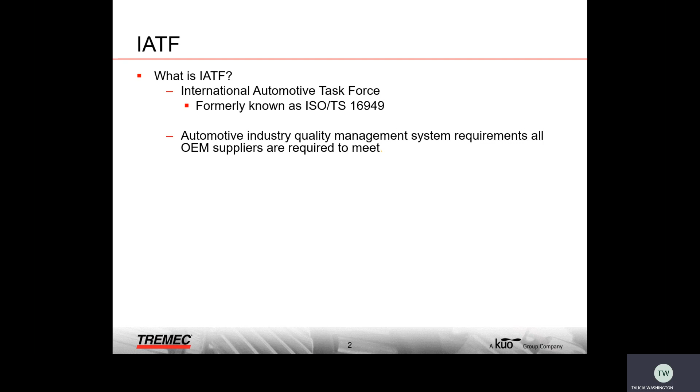What is the importance in obtaining our IATF certification? Besides the fact that it provides our customers with the confidence that we can produce quality products, without it we will not be paid. Without it, we cannot ship, which means we cannot be paid. If we do ship, the customer will not pay us for those transmissions we've shipped to them. So it's free for them.

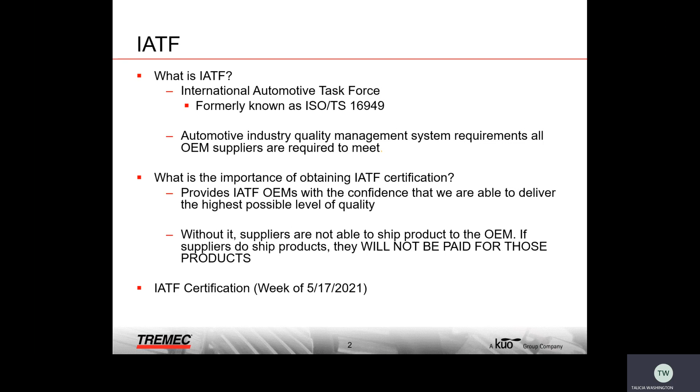So this facility is actually going for certification in May of next year. Now you may be asking, how in the world are we shipping and getting paid if we are not IATF certified? One of the guidelines in order to obtain certification is you have to have 12 months worth of performance data. Since we are a newer facility, we do not have that yet, which gives us a grace period so we can still provide transmissions to our customer, business as usual. We'll still be paid for it and all of that good stuff.

Now, what is a quality management system? Long story short, quality management system is what we do and how we do it. It's our formal system of all of our documents, procedures, forms - having that in one centralized location, our quality policy, the different metrics we measure every month. All of that together creates a quality management system.

Everyone in this facility plays a role in establishing and maintaining an effective quality management system, whether it be documenting our processes, following the processes, or using the current controlled documents. That's a big one, okay?

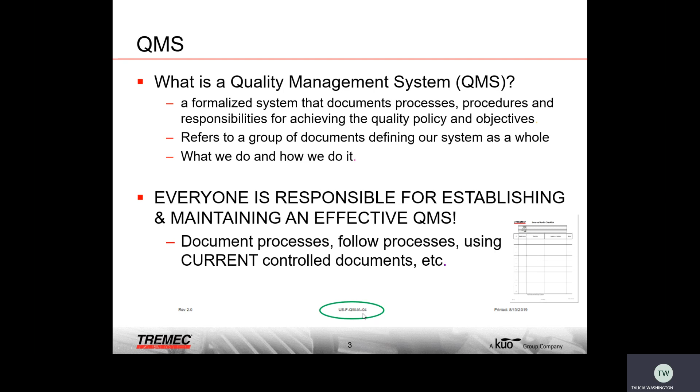So you'll know a document is controlled if in the middle of the form you see US-F, and then there'll be some other letters and numbers depending on the process it belongs to. If that information is not there, it is not a controlled document and we shouldn't be using it. If it says FM- and some other letters and numbers behind it, it's an old document and should not be used.

Here's the quality policy. This policy, it is required that all employees know it and be able to state it in their own words, which shows that you understand it. That is an IATF requirement.

So within a couple weeks, you will receive a quality policy badge. It's literally the size of your ID badge and goes on the same hook. Keep it on your person. Make sure you are looking at it and understanding what it is. Once again, you don't have to know it word for word, but you need to be able to explain it in your own words versus just reading it off if an auditor asks you what it is.

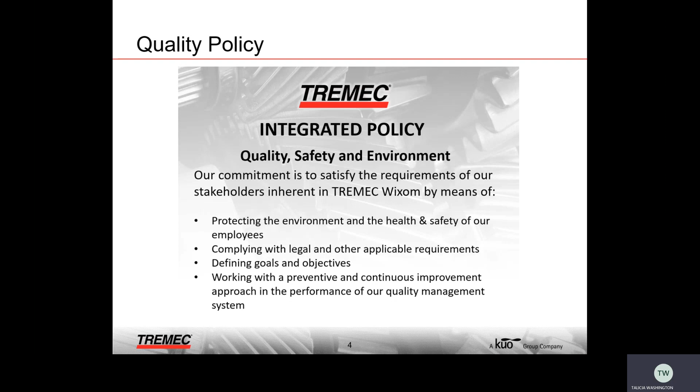Here at TREMEC, we do have a zero defect mentality. We don't want to accept defects from our suppliers, we don't want to make defects, and we definitely don't want to send them to our customers.

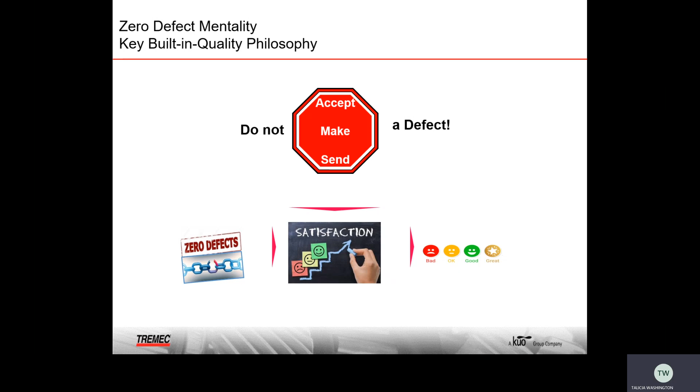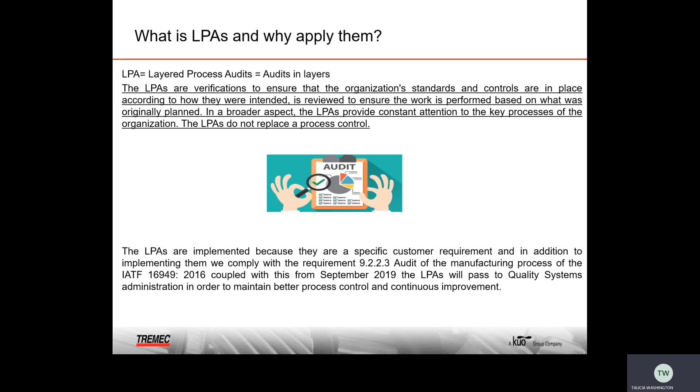So one of the measures we have in place to help with this are layered process audits. Layered process audits are essentially audits done by the office staff as well as supervisors, team leads, and quality technicians. It's an audit trying to make sure that the controls we say we have in place are actually still in place and are effective.

I tell people all the time, LPAs are not to get the operators or the material handlers or anybody in trouble. It is meant to make your life and your job easy, effective, and efficient.

So when you're being audited, don't be nervous. They're going to be asking you specific questions. Some of the questions might just be them trying to get an understanding for their own knowledge. Other questions are going to be directly from the checklist, which stems from typical things that we're doing, making sure we're doing our first offs and things like that, as well as things specific to the control plan and the work instruction.

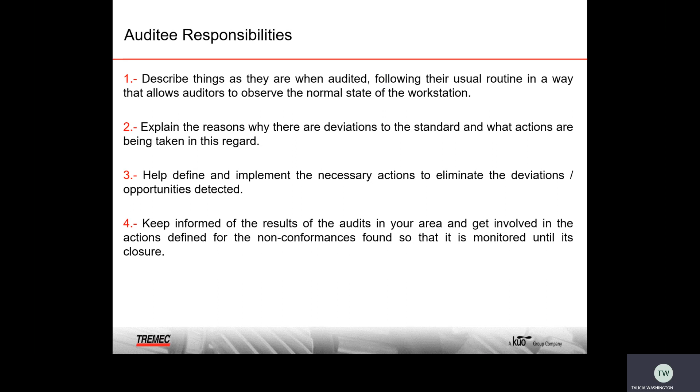So if they ask you a question and you're not doing it, don't feel like you're going to get in trouble or anything like that. Just explain to them why you aren't doing it. It could be a training thing, it could be we need to update the documentation, it could be we just need to update the checklist. Either way it goes, we want to make sure that we get it addressed and fixed.

Now, cleanliness. This is the important part. By now, you should know that we are making the transmission for the Corvette. This is a vehicle that costs about $75,000. I also want you to keep in mind that every single 2020 Corvette is already sold. Even if we're still building that transmission today, it's already sold.

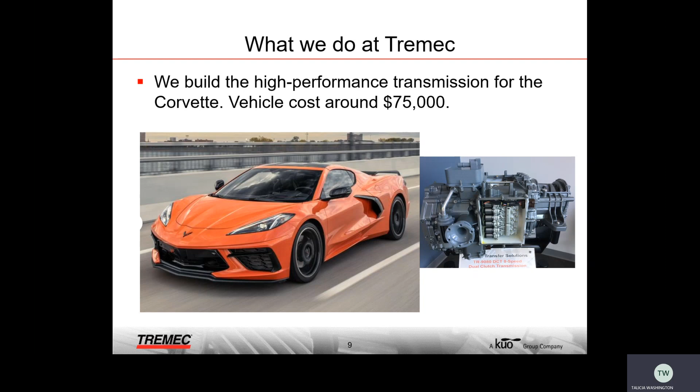Somebody already has it. So I say that to say, if you spend $75,000 on this vehicle that is in extremely high demand, you'll be very upset if you got a transmission that failed for whatever reason within like 8,000 miles. So we show you this picture to see the valve system, which we're going to get into right now. That valve system has small and tight tolerances. The valves control the shifting and the parking of the transmission, which is huge. Too much sediment in those valves will clog those valves.

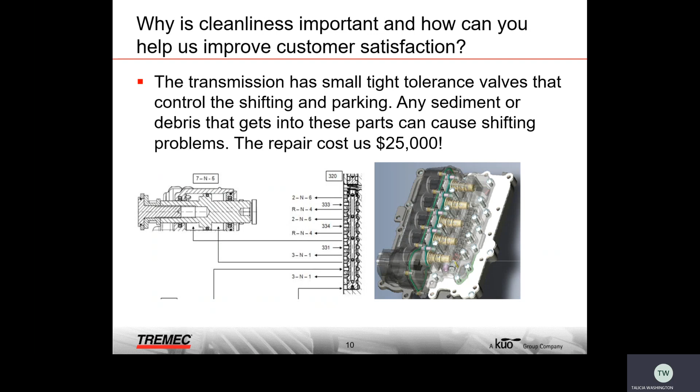If we cannot flush those valves out, we have to completely replace it, which is $25,000 a piece. So that's very huge, and this is why we go through so many measures to completely eliminate debris. Not minimize, eliminate. So 40 microns, we're allowed 40 microns.

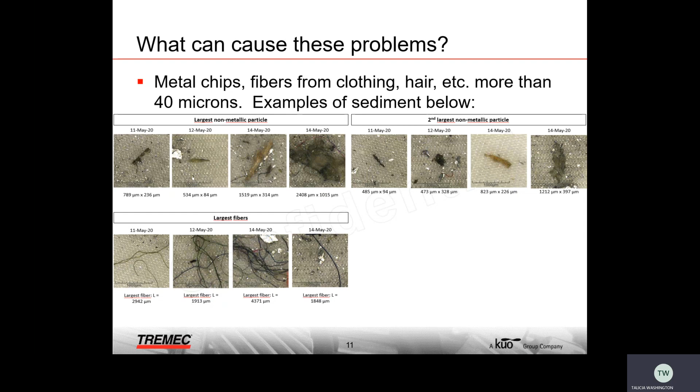These are some samples that we've taken from oil, from transmissions that were on site. Thankfully, they were not sold or shipped yet. You can see the things that were found in the oil. We had to pull those transmissions, make sure we flushed them out, and did what we had to do to get those particles out of the oil.

Now, I know 40 microns is not something you talk about every day. What is a micron? How big is that? To put it in perspective, imagine taking a flower like a daisy that has a lot of pollen, and you shake it in the sunlight and see those little flurries flying off. One pollen is about the size of 40 microns.

Now, putting it in perspective, look at a piece of hair. The diameter of a piece of hair is almost twice the size of 40 microns. So that's telling you exactly how small it is and how sensitive this valve system is.

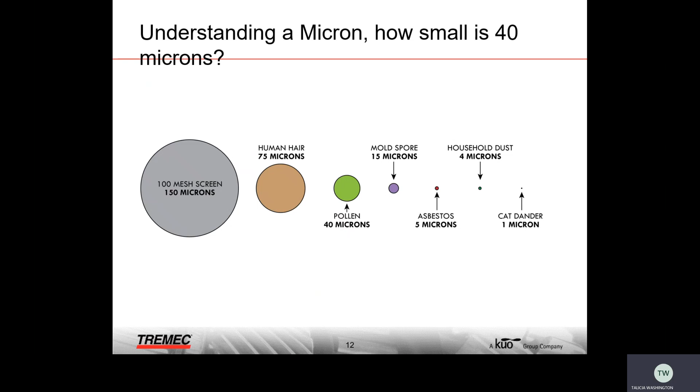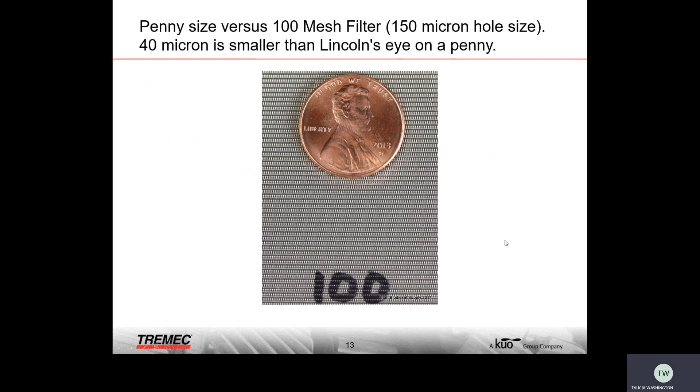Here's another way to put it in perspective. The holes on this mesh filter are 150 microns. Lincoln's eye right here is actually larger than 40 microns. So our allowable tolerance is smaller than Lincoln's eye. That shows exactly how sensitive this transmission is and how important it is.

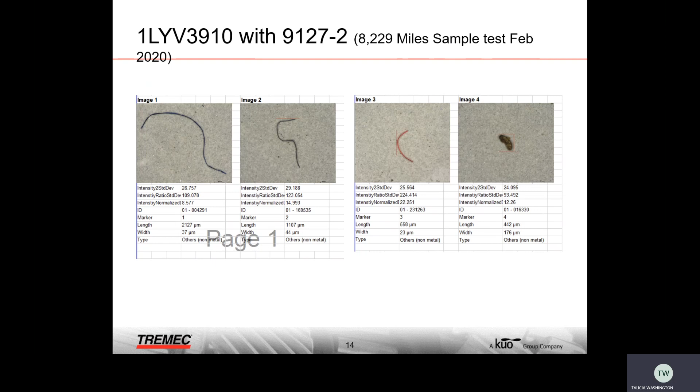Here's an example of a transmission that actually did fail. It failed 8,000 miles in. Once we took it apart and did our analysis, these were the things found. It looks like it could be something off of some clothes, some lint or a string. Don't really know what this is. It looks like it could possibly be a bug or something. Nobody really knows what it is. Either way it goes, the transmission failed, costing us $25,000.

Here's another one that failed 9,000 miles in. Once again, it looks like different threads and things like that it could have been.

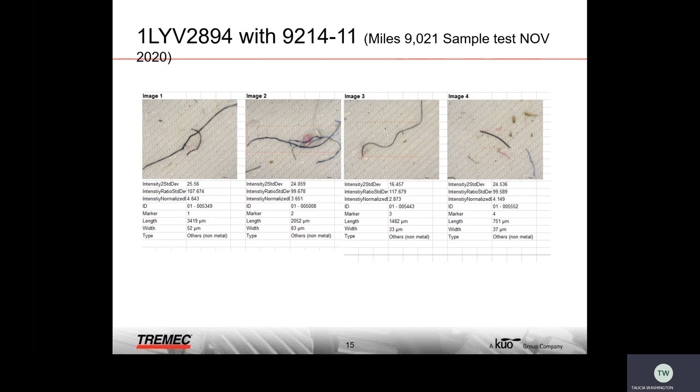As we go on, sometimes you realize exactly how much stuff just kind of falls off, like how many times you just look down and there's a hair right there, or threads from your clothes somehow just end up there. That's why we have all of these measures put in place to eliminate the debris that is falling off in the clean room. That's why we wear those lint-free lab coats, to make sure our clothes are covered and prevent anything from falling off and going into a transmission.

Our gloves, making sure that the required safety shoes do not go outside. They do not leave Tremec. They don't go outside, period. They don't leave the building, I should say. And also the hair nets, the beard covers, all of that.

One thing we're also working on is getting vacuums for the stations. We have a couple, but we want to get more so they're easier to access, making sure people use them so we can really, really get rid of any debris that may be sitting around. The air quality is great, actually great air quality in there. They turn over the air 4 times a day, so we're constantly getting fresh air. Just doing everything we can to make sure we are eliminating debris from the clean room.

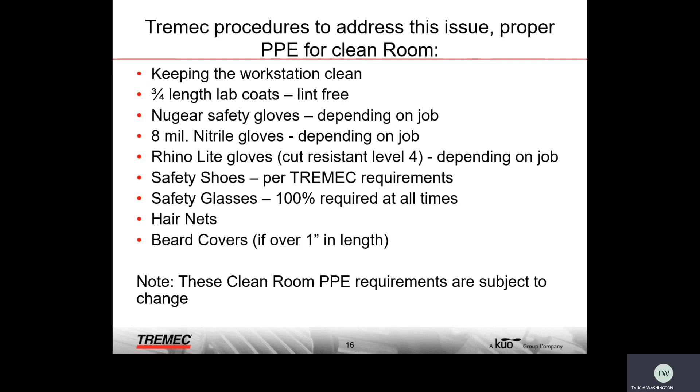One of the other things you may see is the management team coming around from time to time to do sediment audits, specifically for sediments, making sure there's no cardboard in the clean room, making sure there aren't any brooms in the station area, because as brooms get old they start to really collect all the dust and that stuff. So just making sure those aren't in there creating extra debris.

One of the big things would be the returnable containers that your parts come in. Those are cleaned out before they put parts in them, but we've got to make sure they remain clean and we don't have any debris falling on them. Make sure the conveyors are still clean, both while it's in your station, but also a little bit past your station and a little bit before your station. Make sure we're covering all of that.

The tools and the mallets, making sure those are in good condition, making sure the gloves are in good condition. Sometimes as gloves get old, they start to fray and some of the strings start to come out. We don't want that. So make sure you're keeping your gloves in good condition. When you need new gloves, get new gloves. Also, making sure we're not dropping any small components in the transmission, which has actually happened where they found tools and components built inside of a transmission.

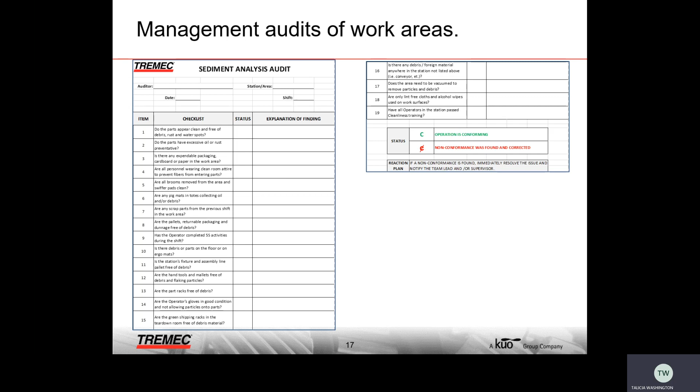Got to make sure we're not doing that. If you drop something in there, make sure you say something so we can get it out and do what we have to do. Also make sure the racks are clean and free of debris, because if the racks are dirty, eventually the parts will get dirty as well. And you will be asked if you've gone through the cleanliness training, and that would be this. So your answer should be yes.